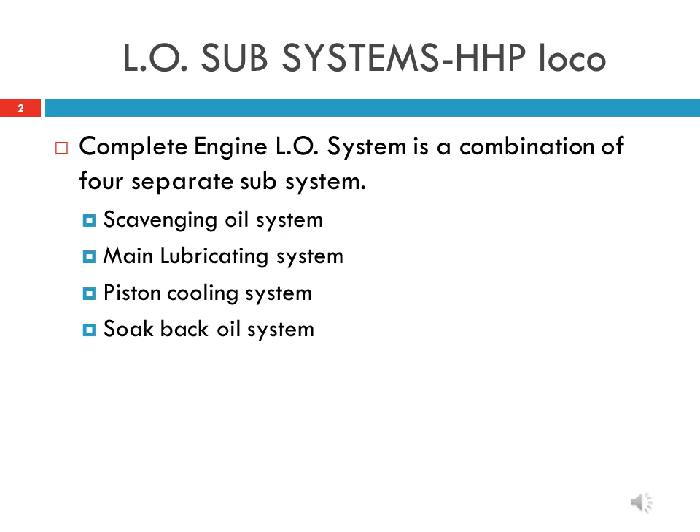Scavenging oil system. To understand a scavenging oil system, we have to know about the engine components involved in this system. The engine components may be seen clearly in these slides. Now let us discuss the various components one by one in different slides.

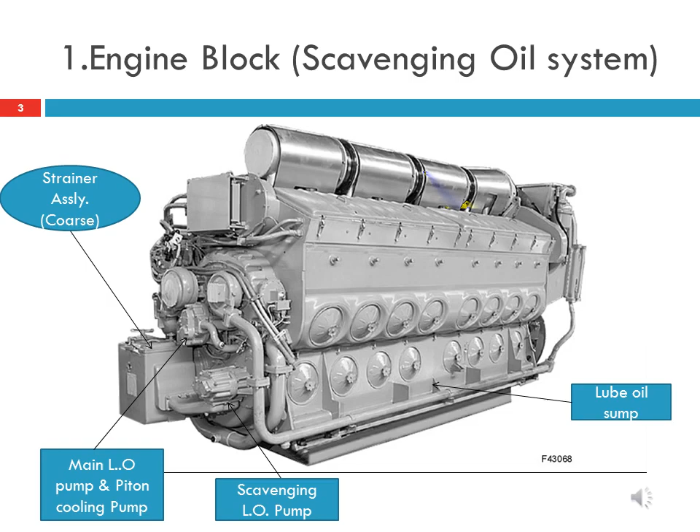Strainer assembly. Strainer assembly has an aluminum casted outer body. It has two compartments. In one compartment there is only one strainer, and this compartment is connected to the suction side of the scavenging pump. The other compartment has two fine strainers, and this compartment is at the suction side of the main lube oil pump.

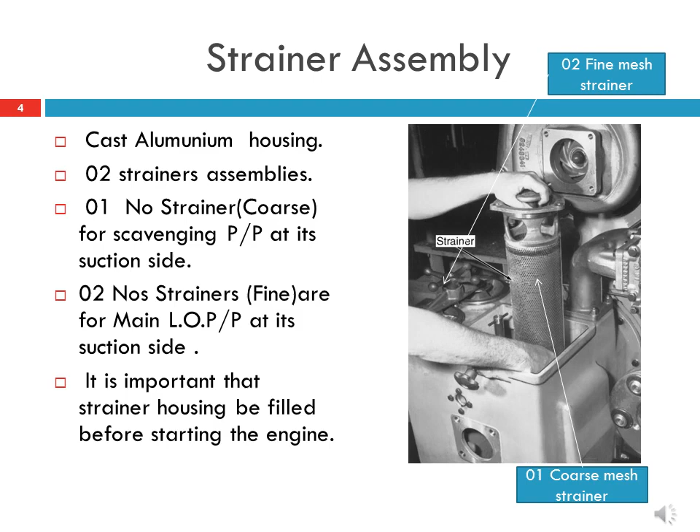Scavenging lube oil pump. Scavenging lube oil pump is a positive displacement helical gear type pump. It is driven by the accessories drive gear, and its discharge pressure is 20 to 35 psi. Its discharge capacity is 405 gallons per minute at 900 rpm.

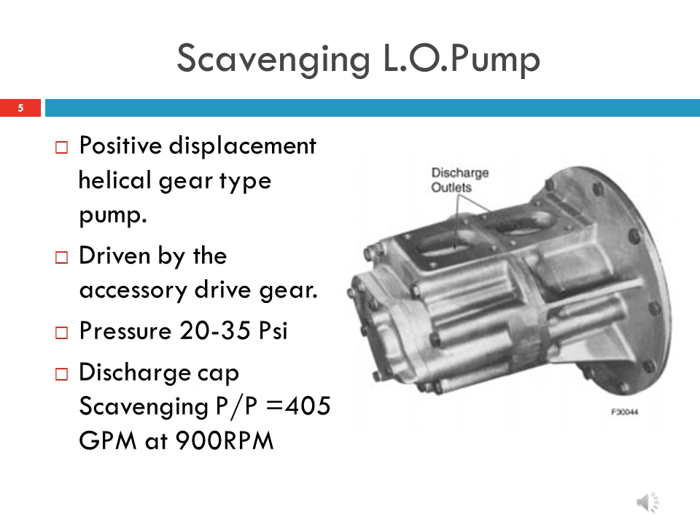Lube oil filter tank. Lube oil filter tank is mounted on the equipment rack and located in the accessories compartment. It has 5 paper type filter elements which need to be replaced after every 90 days. A filter condition gauge is also provided across the filter tank. If the gauge needle shows yellow and red zone, the lube oil filter needs change.

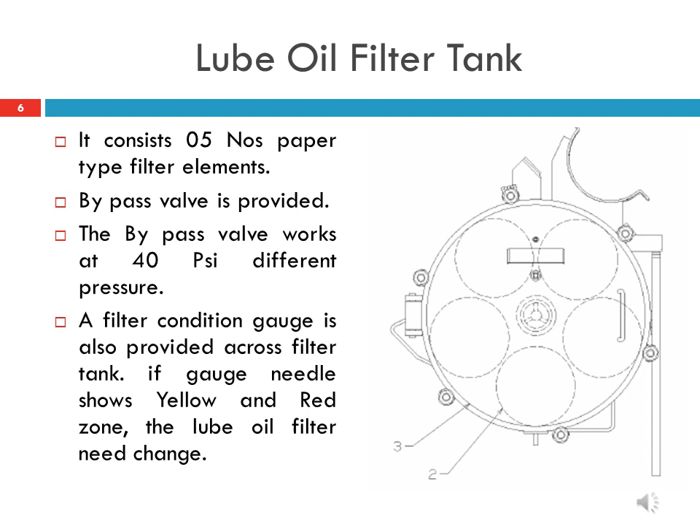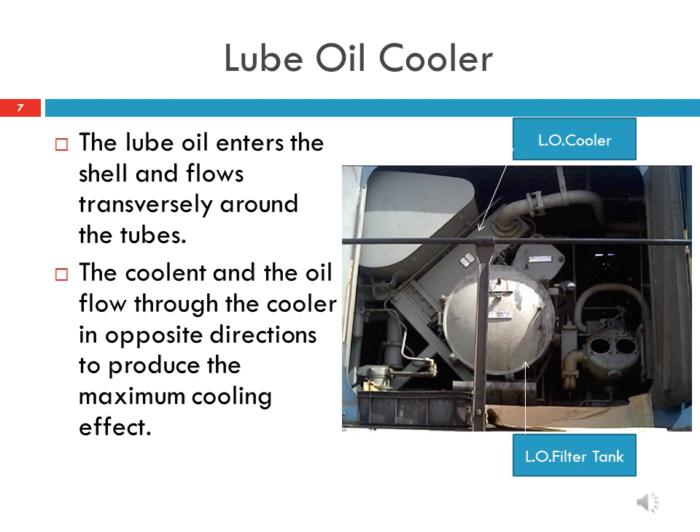Lube oil cooler. A conventional type lube oil cooler is fitted in the HHP locomotive, and it is located in the accessories compartment on the equipment rack. The overhauling of the lube oil cooler is to be carried out after 1 year. The coolant and the oil flow through the cooler in opposite directions to produce the maximum cooling effect.

Scavenging oil system. The scavenging oil system of the HHP loco can be easily understood here in this slide. When the engine starts, the scavenging pump takes lube oil from the oil sump tanks through the coarse mesh compartment of the strainer assembly. Here we have to keep in mind that there are two compartments in the strainer assembly. Now the scavenging pump feeds lube oil to the lube oil filter tank, which is located in the accessories compartment.

After filtration, lube oil from the filter tank goes to the lube oil cooler, where it is cooled by engine cooling water to regain its viscosity. From the lube oil cooler, lube oil comes to the fine strainer compartment of the strainer assembly, where it is filtered once again. Now the filtered lube oil is ready to supply to the engine. Up to here, the system is called the scavenging oil system.

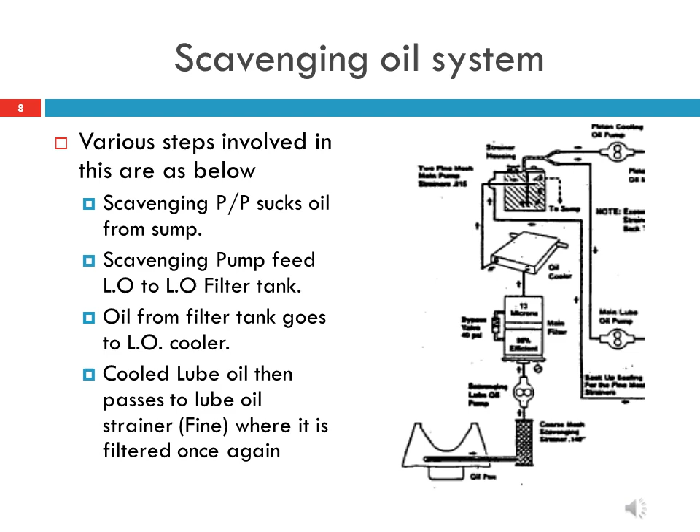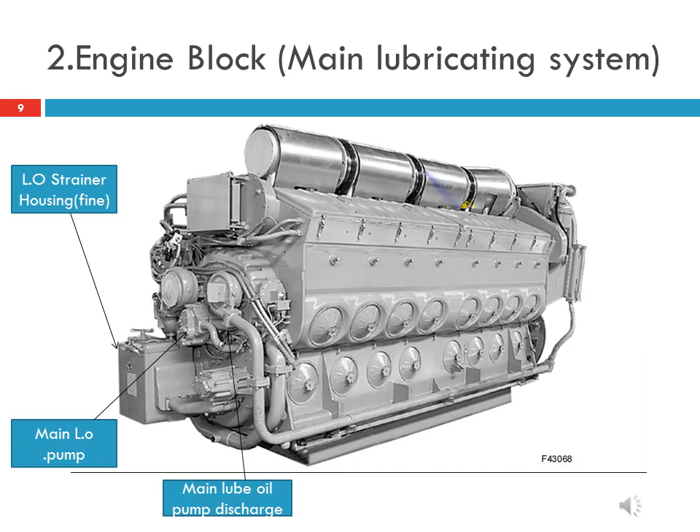In this slide, we can understand the main lube oil pump takes lube oil from the fine strainer compartment of the strainer assembly and supplies it to the main lube oil manifold by discharging at a port. Main lube oil pump is a helical gear type pump. Its discharge pressure at 8th notch is 100 to 120 psi. This pump is driven by the crankshaft of the main engine.

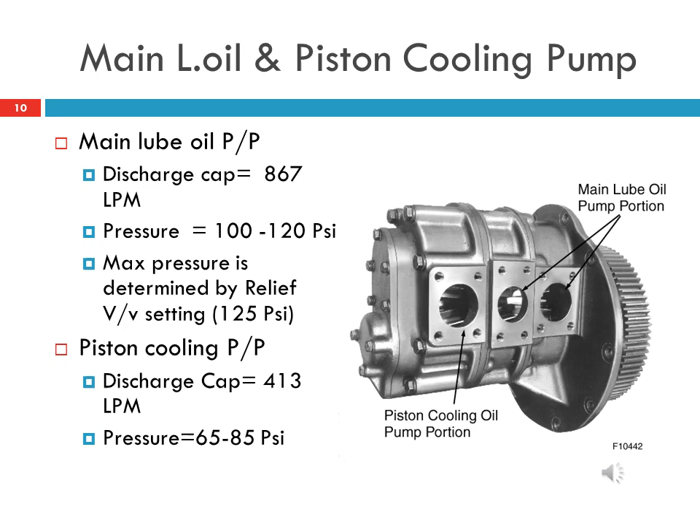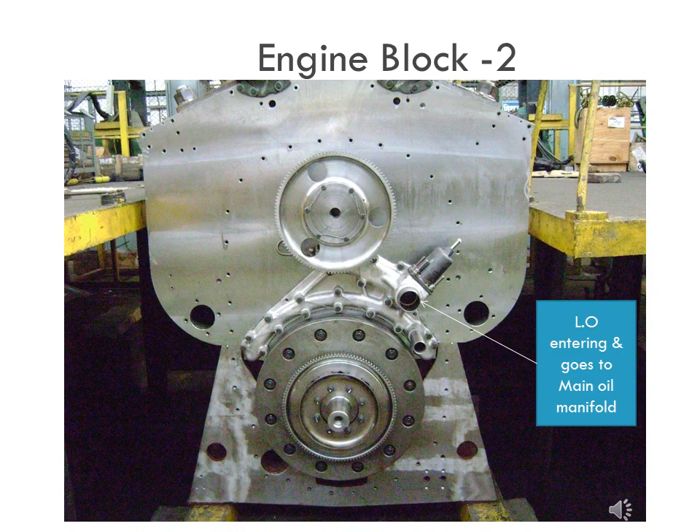Through this slide, I want to clarify that the main lube oil pump discharges lube oil at this indicated point, and this is connected to the main oil manifold. In this slide, I want to show you the main oil manifold's location, which is just above the crankshaft.

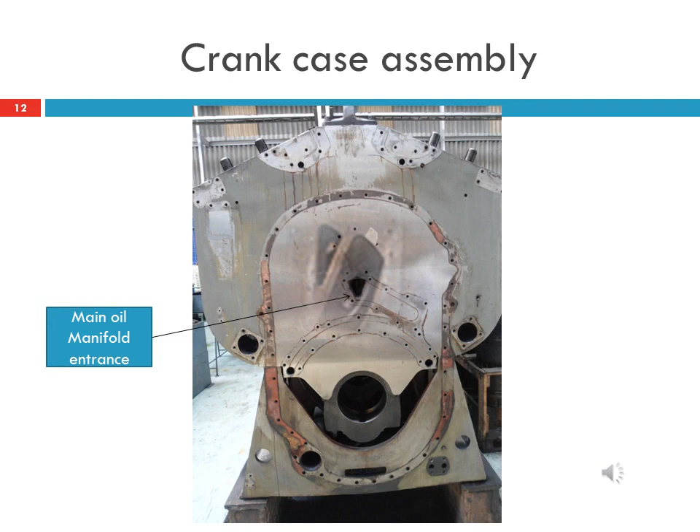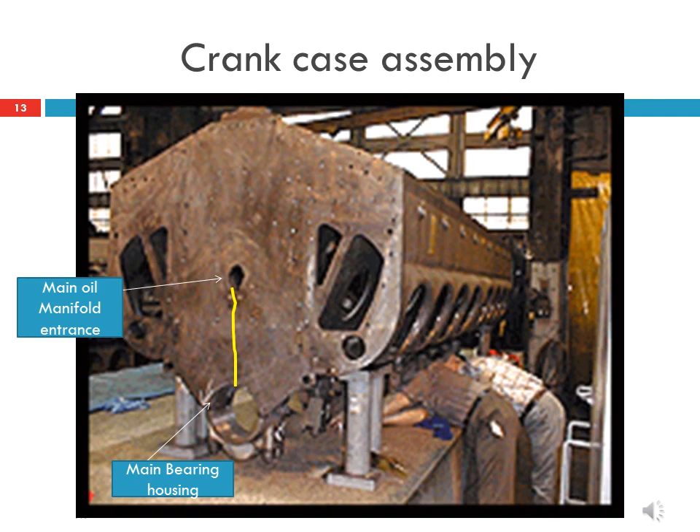Through this slide, I want to explain how the crankshaft main bearing receives lube oil from the main lube oil manifold through a copper pipe. In HHP locomotives, there are a total of 10 crankshaft main bearings, and all main bearings get lubricated in the same pattern with the help of the copper pipe connection.

In this slide, the main lubricating oil system can be easily understood. The yellow line indicates the flow of lubricating oil discharged from the main lube oil pump. First, the main lube oil pump takes lube oil from the strainer assembly through a common suction. Further, lube oil goes to the main lube oil manifold.

From there, lube oil goes to all crankshaft main bearings. Drilled passages in the crankshaft supply oil to the connecting rod bearings, vibration damper and accessories drive gear at the front end of the crankshaft. At the rear end, the camshaft, stub shaft, idler gear number 1 and 2 and turbo supercharger gear train also get lubricated. An oil line from each camshaft bearing at each cylinder supplies oil to the rocker arm shaft, rocker arm, cam follower assemblies, hydraulic lash adjuster and to the rocker arm. Finally, the lube oil is returned to the sump tank.

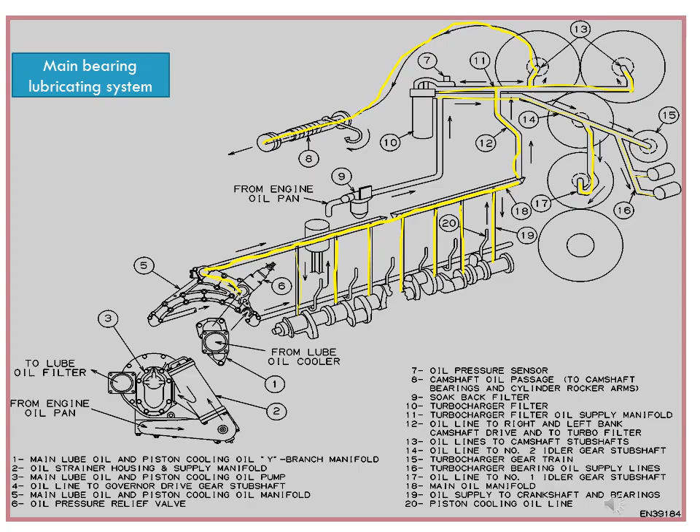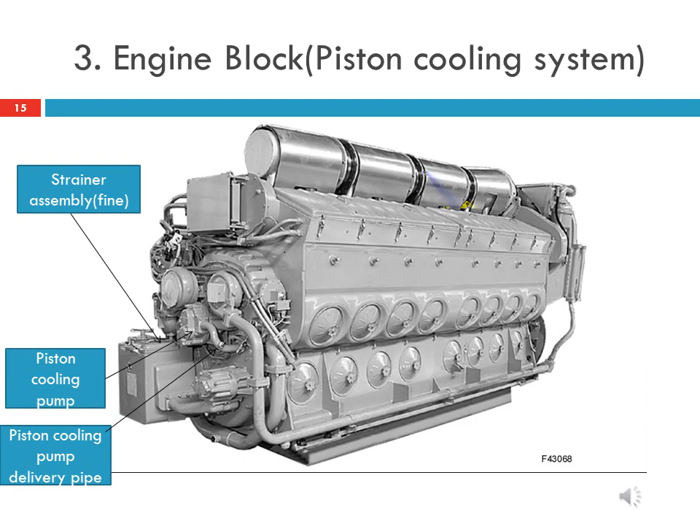In this slide, we can easily understand that the main lube oil pump and piston cooling pump are contained in one housing and mounted in the center of the accessories drive housing. Both lube oil pumps receive oil from the strainer assembly through a common suction pipe. Through this slide, I want to make you understand the location of lube oil discharge by the piston cooling pump.

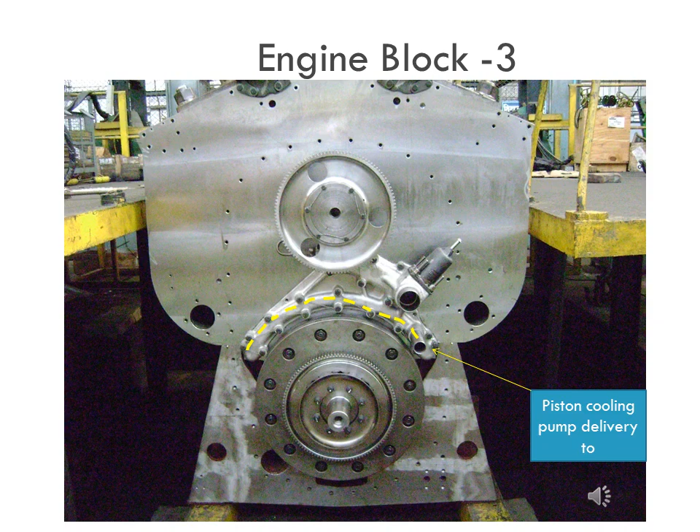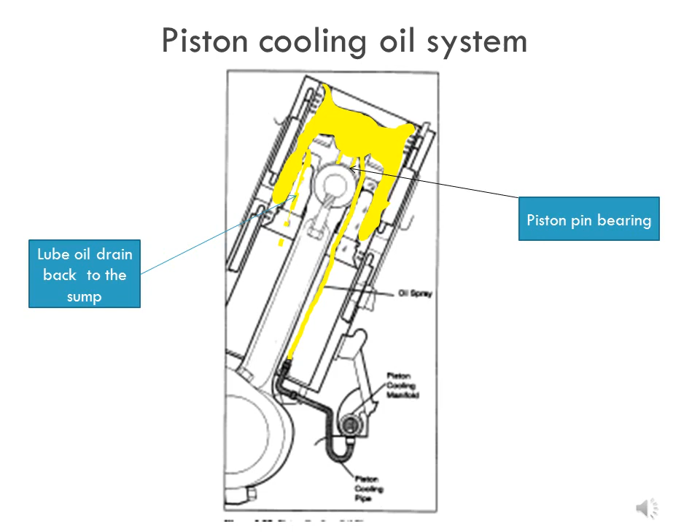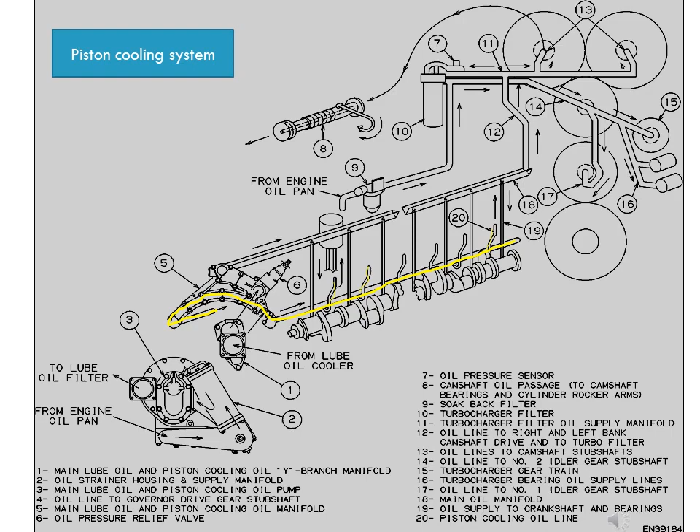Piston cooling system. In the piston cooling system, the piston cooling lube oil pump receives oil from the strainer assembly through a common suction pipe and delivers oil to the two piston cooling oil manifolds extending the full length of the engine, one on each bank. A P-pipe or piston cooling pipe at each cylinder liner directs a stream of oil to cool the underside of the piston crown. This stream of oil also lubricates the ring belt. Some of this oil enters oil grooves in the piston pin bearings for lubrication. Oil after cooling and lubrication drains back into the oil sump.

Soakback system of HHP locomotive. In HHP locomotive, a separate lube oil system is provided for the turbo supercharger. This system is called the soakback system. The main purpose of this system is to ensure the lubrication of the turbo supercharger bearings prior to engine start. This system also removes heat from the turbo bearings after engine shutdown. This system is controlled automatically by the locomotive control system.

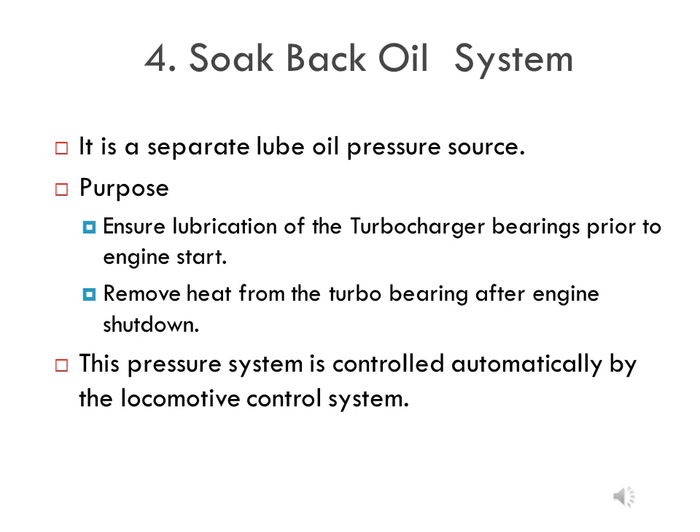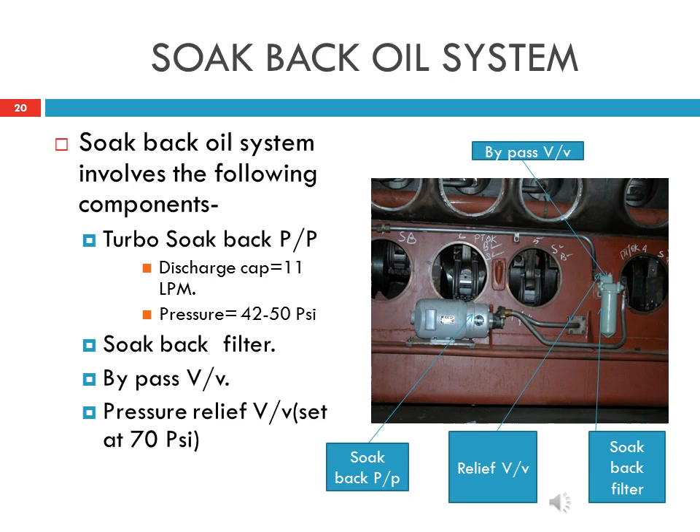Soakback system layout. In the soakback system, an electrically operated turbo soakback pump draws oil from the oil sump and feeds it to the turbo bearings. This soakback pump automatically starts working before cranking of the engine. When the engine starts, the main lube oil pump pressure becomes greater than the soakback pump pressure. At this time, the relief valve provided in the soakback filter head, which is set to 70 psi, will return the lube oil back to the engine sump. After shutting down of the main engine, this soakback pump starts working automatically and supplies oil to the turbo bearings and saves them from thermal stressing.

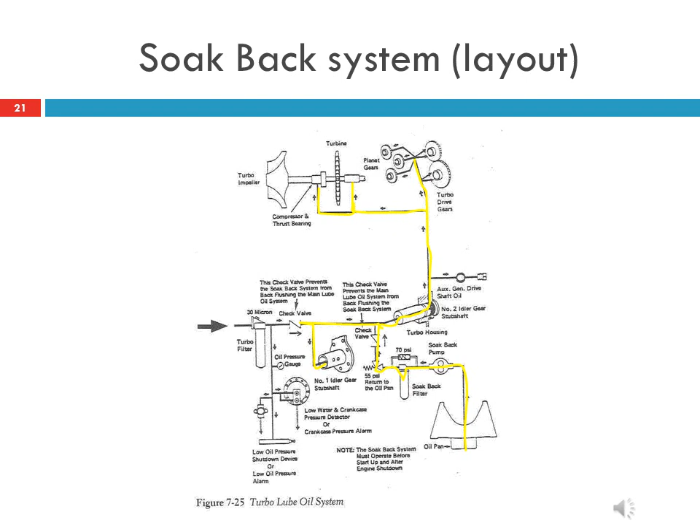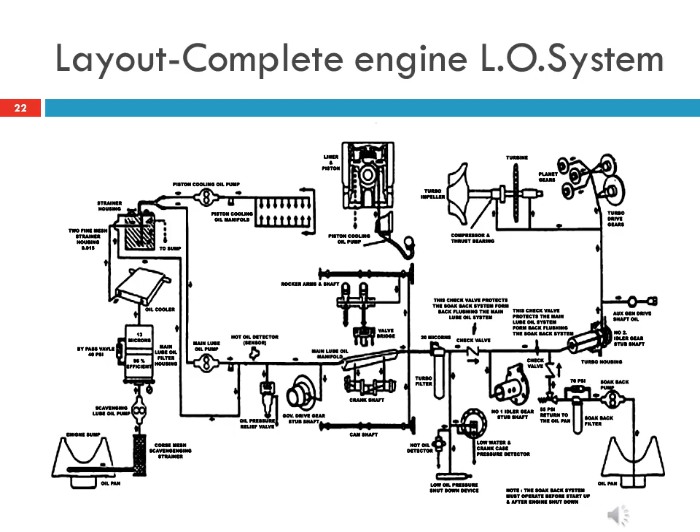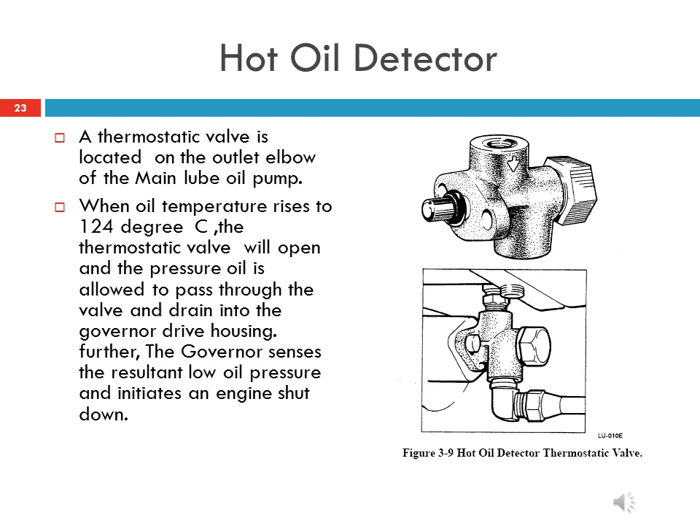Hot oil detector. The hot oil detector is an engine safety device located on the outlet elbow of the main lube oil pump. When oil temperature rises to 124 degrees centigrade, the thermostatic valve will open and oil is allowed to drain into the governor drive housing. This results in low lube oil pressure and engine shutdown.